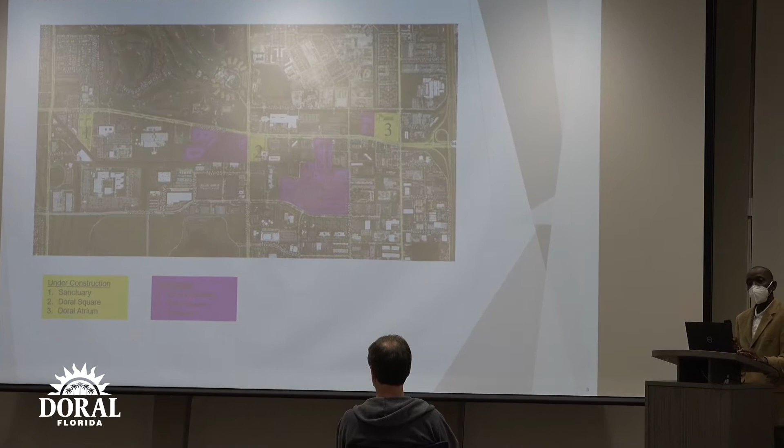These two here are under construction. Actually, these two here, the Doral Square and the atrium, which is at the far end of the corridor, are still under construction. And the sanctuary, which is not too far from here, has already been completed, and people have already started moving in. And these ones in purple were completed a few years back.

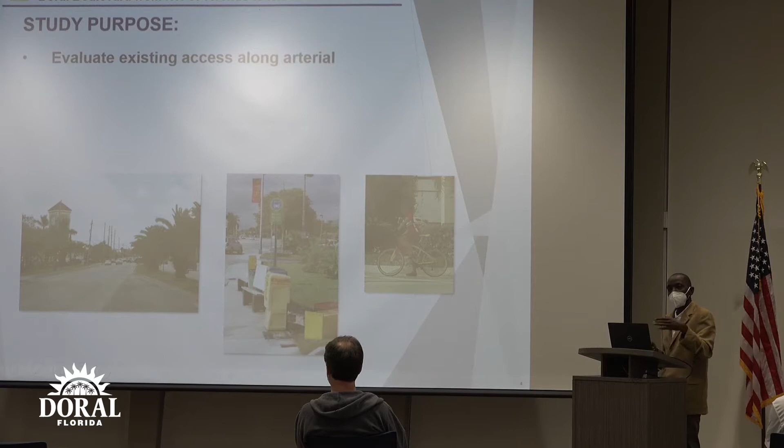So the first purpose is basically to evaluate the existing access condition along the corridor, identify potential improvements that we can recommend to enhance safety, improve mobility, and also enhance traffic flow for all modes. This includes vehicles, pedestrians, transit, and everybody else. And then the last purpose is to improve accessibility and connectivity to all the businesses along the corridor.

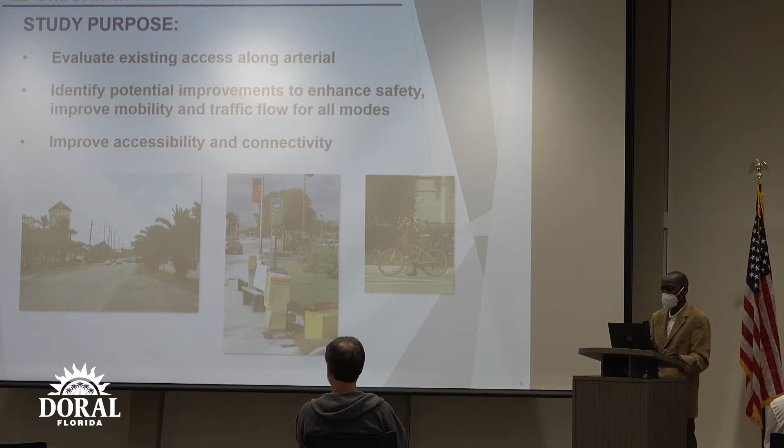The study has got a 9-month schedule. We started this back in November with data collection, which we have completed. And the final report is not expected until sometime in July, after the client has reviewed our recommendations and we have gotten input from other stakeholders.

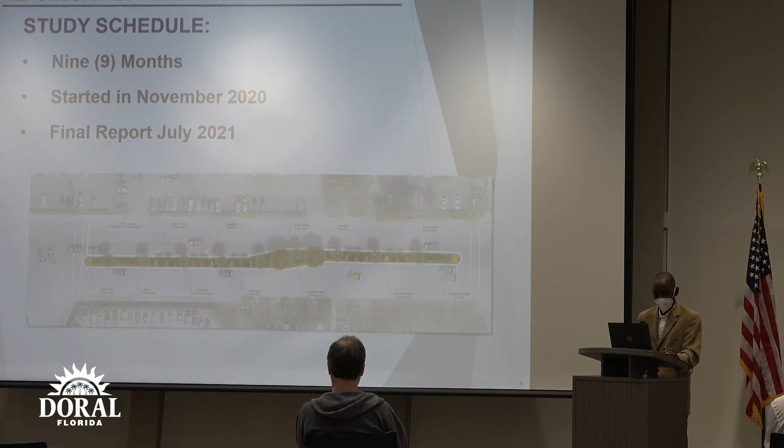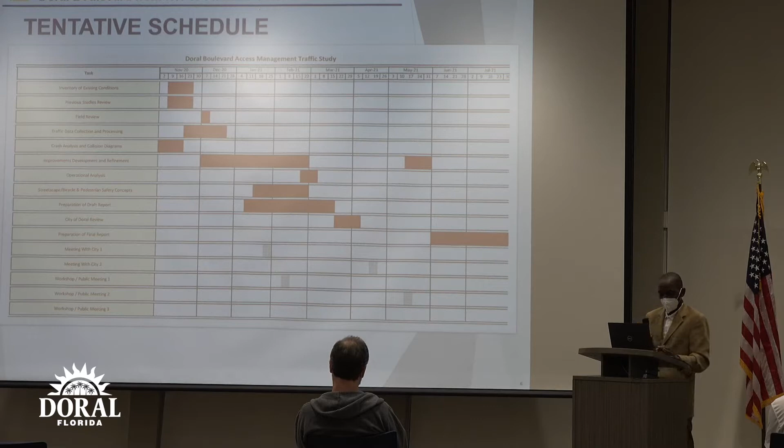This is a schedule of all the activities that we are going to be conducting. I don't know if you guys can see this, but this workshop that we have today is also in the schedule. So this is the first workshop that we are having, just to inform you about the study. And we are going to have another one sometime in April, where we'll have some concepts already developed so that you guys can see what we are proposing to change along the corridor.

These are the study limits, as we say. It starts at the western end, just to the west of the 97 Avenue signal. There's a median opening that services the Publix Plaza. So that's going to be the beginning of our western end, and then it goes all the way to the Palmetto here. This is the signal from the off-ramp. So this is the limit.

We have all the businesses listed. We have all the median openings shown, and we are showing also the same information on the board over there. So our study methodology basically includes the following activities.

We are going to be doing traffic data collection, which we have already completed. We started this exercise back in November. We are looking at traffic data, vehicular data, pedestrian data, bicycle data. So we have already completed that, and we are going to be making some adjustments to that data, given that right now with the pandemic and everything, traffic might not be the same. So we'll be doing some tweaks to the data that we have collected.

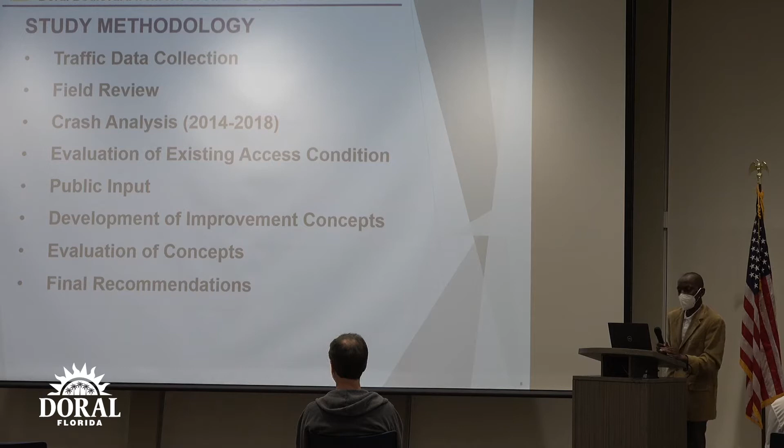So up to this point, like I said, we have already completed the traffic data collection. We have conducted the field review, completed that. We have done the crash analysis. We're going to be showing you some of our findings about the crashes along the corridor. And we have also completed the evaluation of existing conditions. So we know the median locations, how far apart they are from each other, and what we think needs to be done going forward in order to make the improvements.

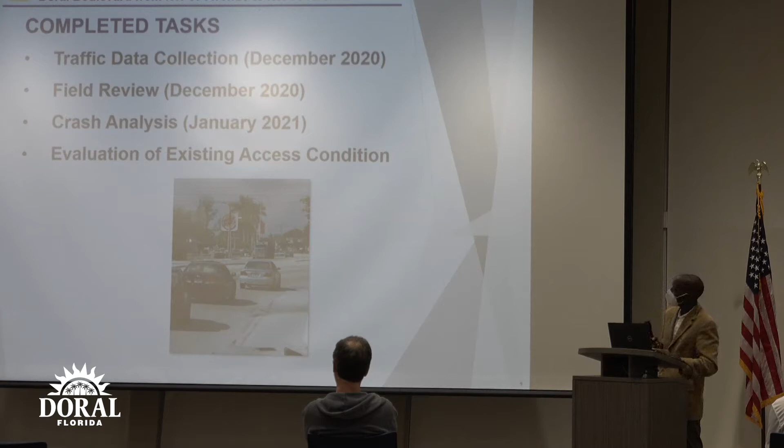So this is a summary of the findings from the existing condition. So the corridor itself, if you start from 97 Avenue all the way to the off-ramp of 826, we have 9 signalized locations, which probably you all know about. And then we have 20 median openings.

The 20 median openings consist of 17 full median openings, meaning that a full median opening allows all kinds of movement. You can come from a side street to make a left turn. If allowed, you can go across if there's a receiving lane on the other end, and you can make left turns from the arterial, from Doral Boulevard. So we have 17 such full median openings, and then we have 3 of them which are directional, meaning that they only allow left turns from Doral Boulevard, either in one direction or both directions.

So the median openings and the driveways that we have, given the existing spacing between them, most of them do not meet the FDOT criteria, which is what we are going to be using to do the evaluation to see if the access meets the criteria or not. The criteria is mostly based on the spacing.

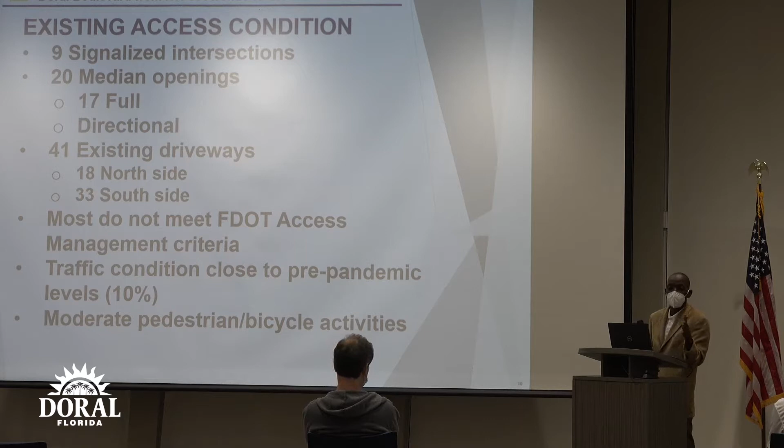We looked at the traffic condition. Like I said, we have completed this exercise of traffic data collection. And from our initial findings, we see that the traffic is within 90% of the pre-pandemic levels. But we will be doing some tweaks to the data just to make sure that we don't leave anything out. So if we say we close a median opening, we don't want to close it based on wrong data. So we are going to be making sure that the data that we're using for this exercise is absolutely close to what the reality is.

And then we found out that the level of pedestrian and bicycle use at the time when we did the data collection was a little low, was moderate, I would say. There were some activities, but it was moderate. Yes, sir?

Yeah, so the traffic data from all those developments, we'll take those into consideration when we are evaluating the future conditions. So once we have developed our improvements, we're going to see what it is that we're looking to be having along this corridor, say, in 5-10 years when all these developments are in place. So yes, we'll take all that into consideration.

Hi. So right now we're just doing the existing evaluation, and we're collecting all the traffic studies to develop the volumes and then do the projections based on the alternatives. So we'll study all the alternatives, and then we do the projections, the diverted traffic, once we build out the future volumes. But we're collecting that data now to develop the future volumes to then start testing the alternatives. But we're not there yet. Thanks, Rita.

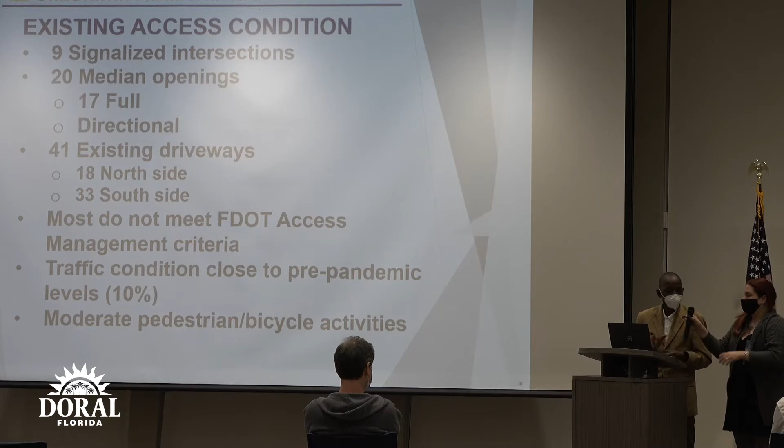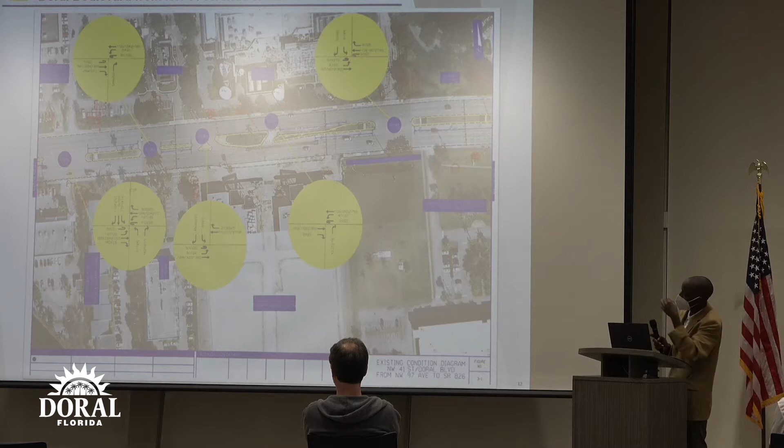And the things you see in yellow here are the peak hour traffic data that we have collected at these locations. So we have three numbers there. We have the number during the AM, the morning peak hour, and then the number during the midday when people are going out for lunch, and then the number during the afternoon peak when people are coming from work and going back to their residences. So if you go along the corridor, you'll see all this information at each location where we have collected the data. So I'm just going to skip through this.

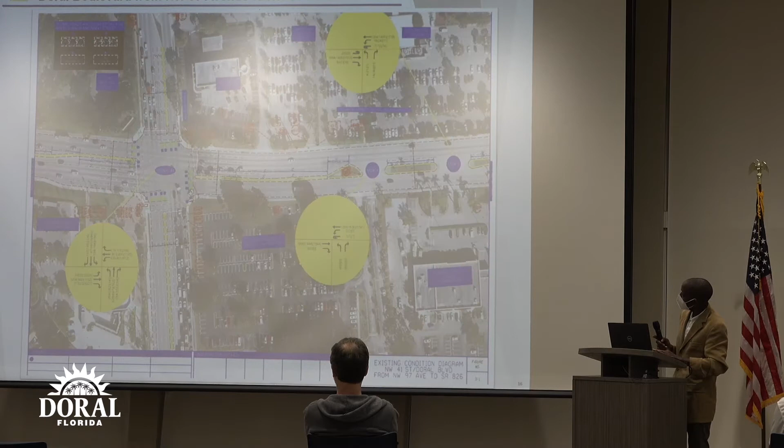So when it comes to crashes, in the 5 years of data that we looked at, we found out that there were a total of 992 crashes, almost 1,000 crashes. And the split of these crashes involved 107,

Oh, did I skip one? How do I go back here? Sorry, just a minute.

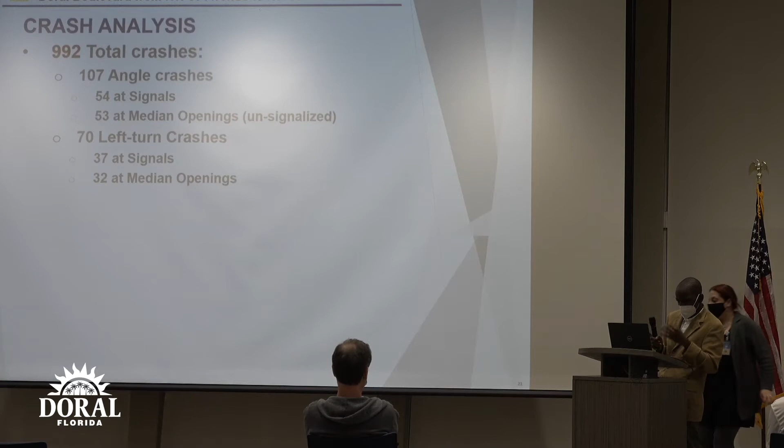Now I want to go back to the last slide. Yeah. Oh, okay, that one is here. There? Yeah. Okay.

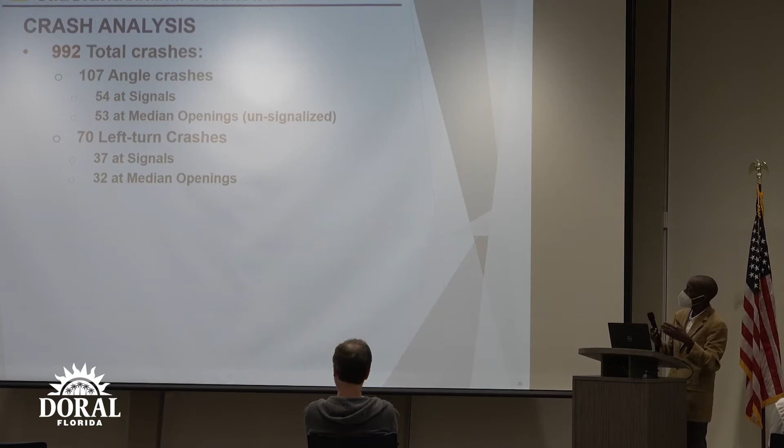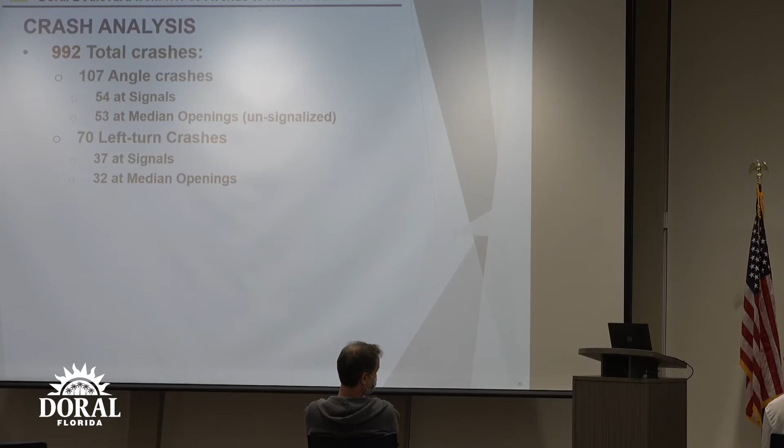There's one slide I'm missing here, but anyway, we had a total of 992 crashes. 107 of them were angle crashes. Now, why is this important? Angle crashes mostly involve, let's say for instance, a situation where, if I can move here, someone is coming out of their Publix plaza and they want to go east. And then you have someone driving along the corridor in either direction and they T-bone each other. We call that an angle crash. Okay? We also have 70 left-turn crashes.

That involves a movement like you want to enter into the Publix plaza, so you're going east, you want to turn left, but then there's this guy here coming from the signal going west. And then for some reason, because you misjudged the gap or whatever, you run into each other. We consider that a left-turn crash. These are important, especially when we are dealing with the median openings which are not signalized, like at a signal. So we had 70 left-turn crashes and 107 angle crashes.

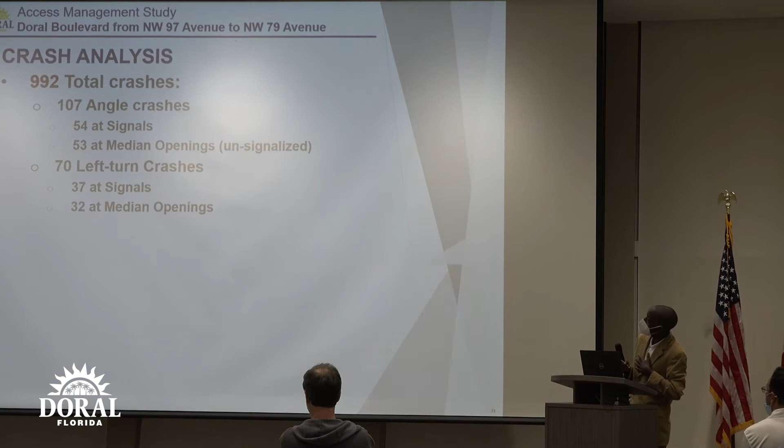Now, of the 107 angle crashes, 54 of them happened at signalized locations, at the 9 signals. They are spread throughout the 9 signals, and I'll be showing you where most of them happened. And then we had 53 at these unsignalized locations, at the median openings where we allow all these movements from their businesses to the north or south. And then of the 70 left-turn crashes, 37 of them happened at the signals, and 32 of them happened at the median openings.

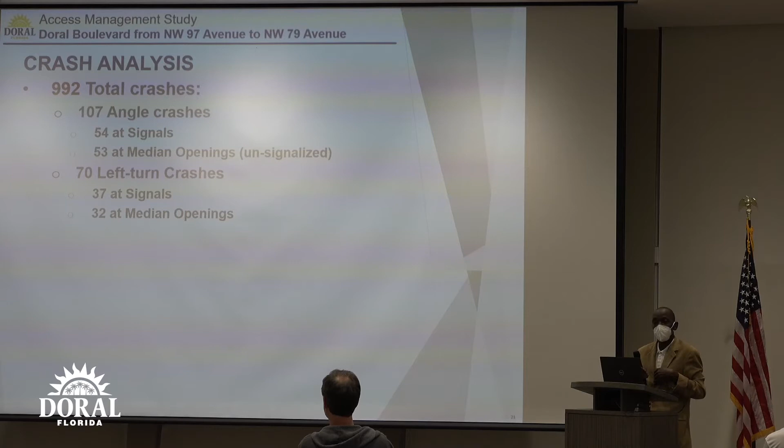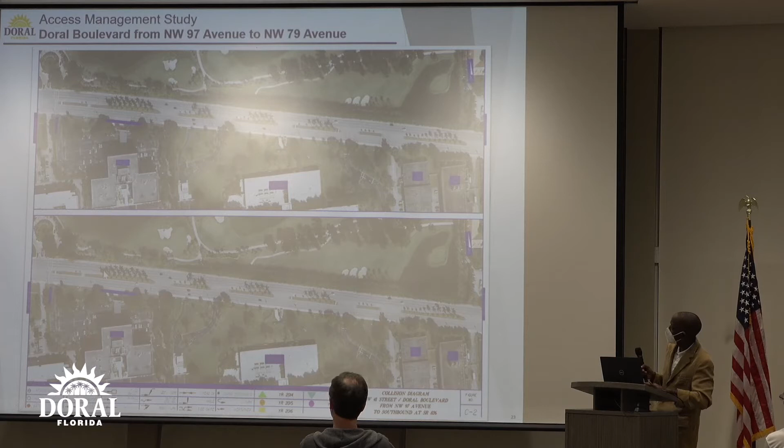So this gives you an idea of the crash pattern, and this crash pattern will continue as we add more traffic with all these developments. So we are not expecting these numbers to go down. Most likely they're going to go up. So this is, there's nothing on this corridor here. This is where the Federal Reserve is, I think. No, this is the AT&T. This is where the Federal Reserve is. Nothing happened in this corridor. At least in this part from 93rd all the way to this signal here, we didn't have much happening.

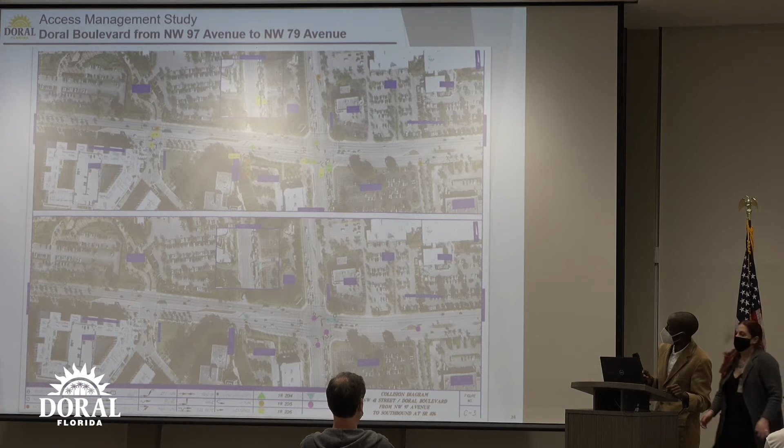Now this is 87th Avenue, as you can see. At 87, we had a few crashes, but not as bad as what we would have expected given the amount of traffic. We had a few angle crashes, but for angle and left-hand crashes, the numbers were not as bad. But when you combine all the crashes, like rear end and sideswipes, rear end is when you're following each other, and the person in front of you stops and you run into them. Sideswipe is when you're trying to change lanes and you misjudge how far the other vehicle is. So when you combine all the crashes, the number is high, but when you just look at angle and left-hand, the problem is not as bad.

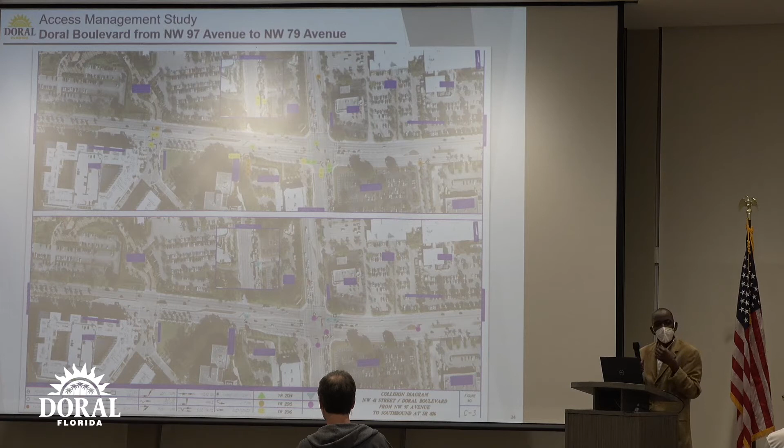We had a few crashes here at this opening, which accesses the Trump property. But all these crashes happened before that signal just to the west of it, at the Gateway. Is that the name of the property? Those apartments, the Gateway, right? So this happened before that development was completed, before the signal went into place, and before they modified this median opening here. So in other words, we do not expect to see that problem going forward.

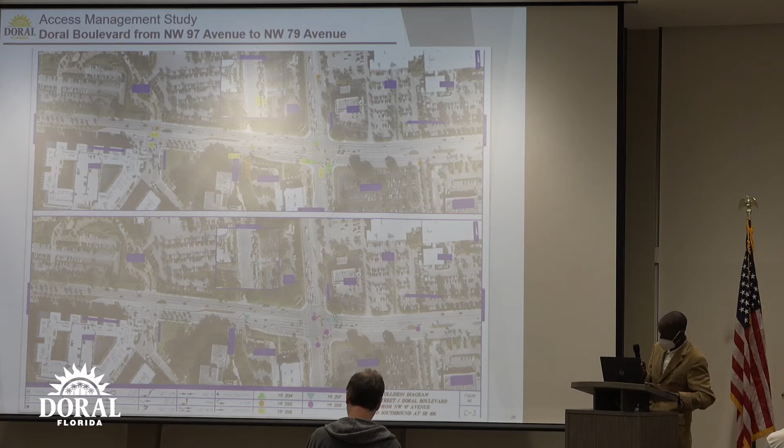Okay. And then, as you can see, we have a few more crashes scattered along the corridor. So this information is one of the things that we'll be using when we are contemplating what kind of improvements we are going to propose for the corridor. All this information that I'm sharing with you, we are going to take into consideration to see what is feasible and why. Why should we do this here? Why should we close this median opening here, or leave it open?

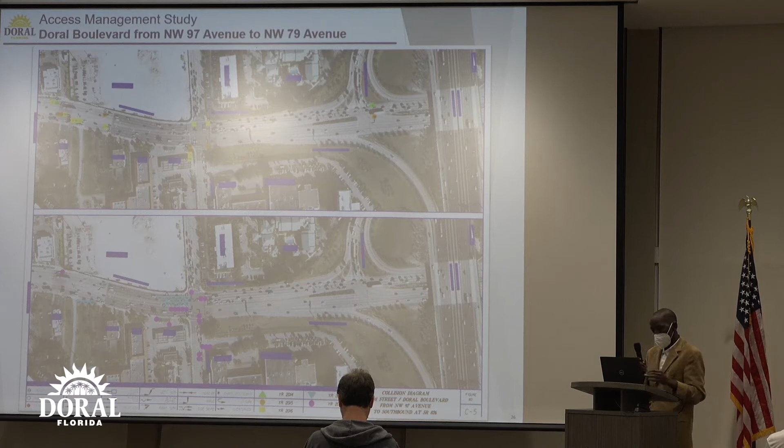And those are the steps that we have. Those are the things that we have completed so far. So the next step from now going forward is for us to look at all this information that we have collected, and then start developing our improvements, and then evaluate those concepts from an operational standpoint of view, and also from the economics of it, and then provide them to the client.

So sometime in April, we are going to be having another workshop where we can share with you guys what sort of improvements we have so far developed. So with that, at this point maybe you might not have any questions, but if you have any question, we would be more than happy to try to answer them. But this is still work in progress. We're just at the beginning of the exercise. We're still looking at all these concepts, so if you have any question, please feel free to ask.

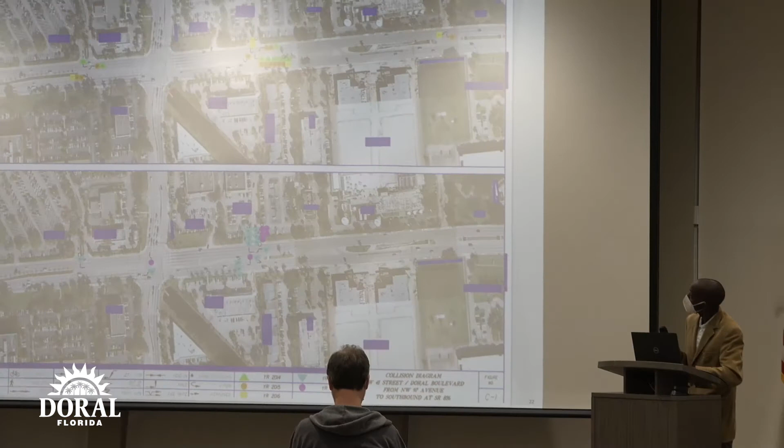Some of them might be like the one I showed you. Yeah, like this one here. Like this one. See all this data, all those crashes? This is at the same location. So this plus what you see above, this is just a two-layered view of the same crash. We had 29 angle crashes in 5 years. That obviously is a very tough spot, and if anything has to be closed, that will be among the ones that we're going to be looking at.

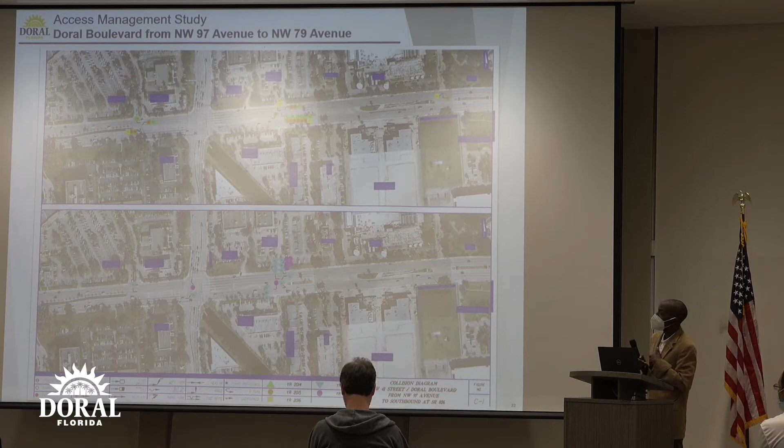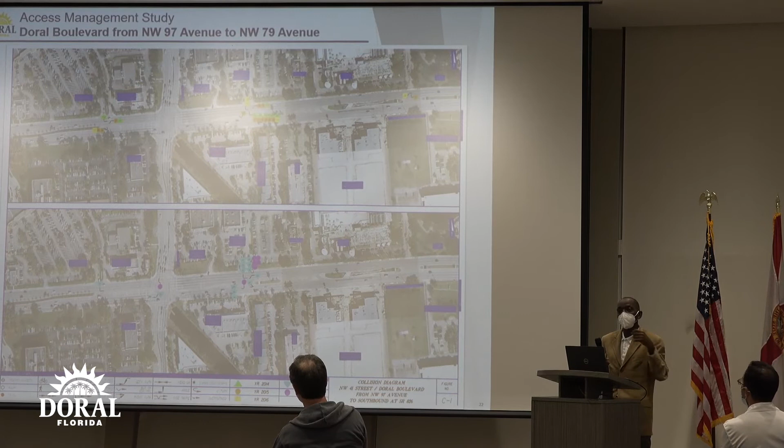Yeah. This is the one. Yeah, so you got it? Yeah. Mm-hmm. Yeah.

If I may elaborate, we're going to be coming up with different alternatives based on different criteria to come up with improvements from a holistic perspective throughout the corridor. And then we're going to be testing to see what makes more sense from a traffic perspective, because sometimes if we close something, we may impact another intersection upstream or downstream, and it may not be feasible. So we have to take a look at it from that perspective to see how we impact the area while mitigating traffic and the crashes the best we can.

Yeah. So thank God, like I said, we have some developments that collected data for those studies. So what we're going to do is try to compare the data that we collected against the data that they collected back then and see what the difference is like. And not only that, at one of the locations along the corridor, I think it's 87th Avenue, there's a permanent count station by the DOT. What that does is it collects data throughout the year.

So the data that we collected in December, we are going to compare that with that count station data. And if the difference is not significant, then we can rest assured that, yeah, it might not be the same as pre-pandemic, but the difference is not more than this number. It might be 10%, 3%. So those are the things that we're going to be looking at. Yeah.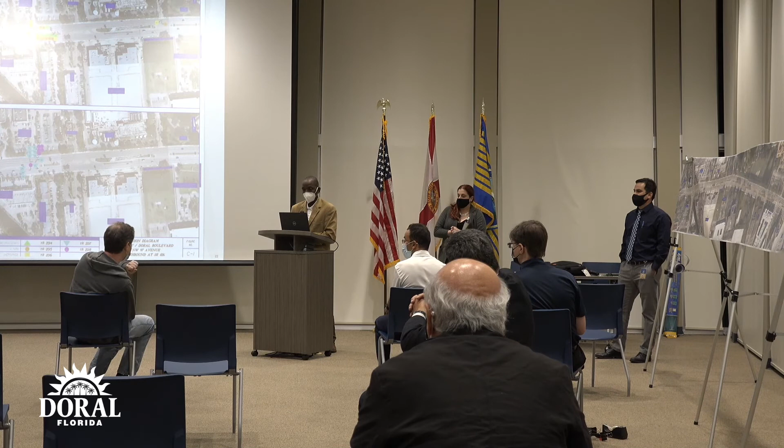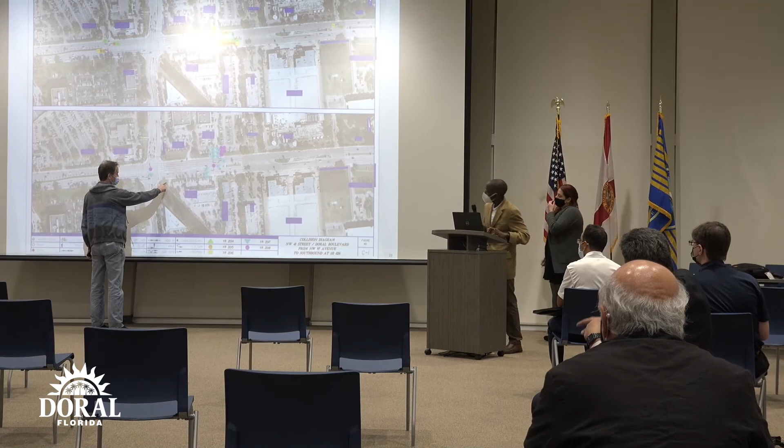Let me go to the Burger King location.

And you hit the red. Yeah, yeah. Trucks. No problem, they don't hear me. Someone wants to hear me. That's nice, I'm becoming popular for the good or the bad.

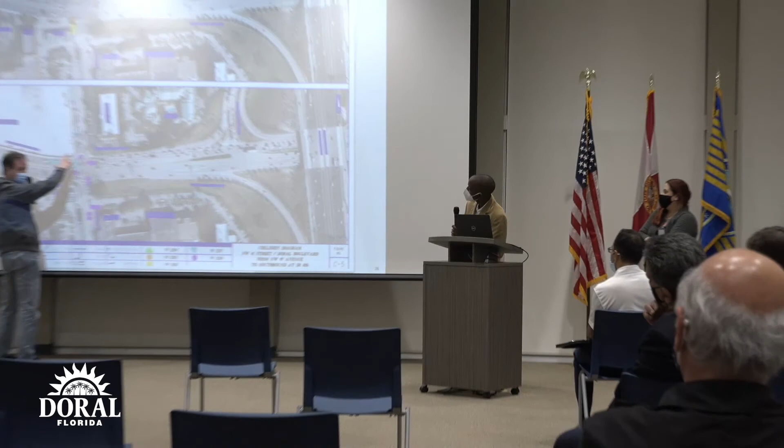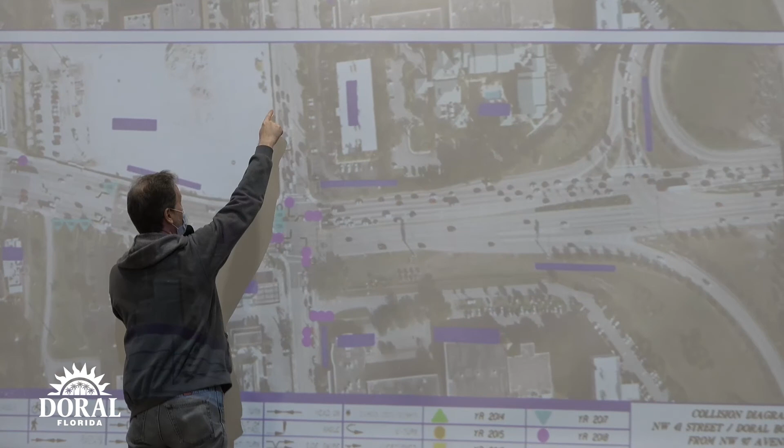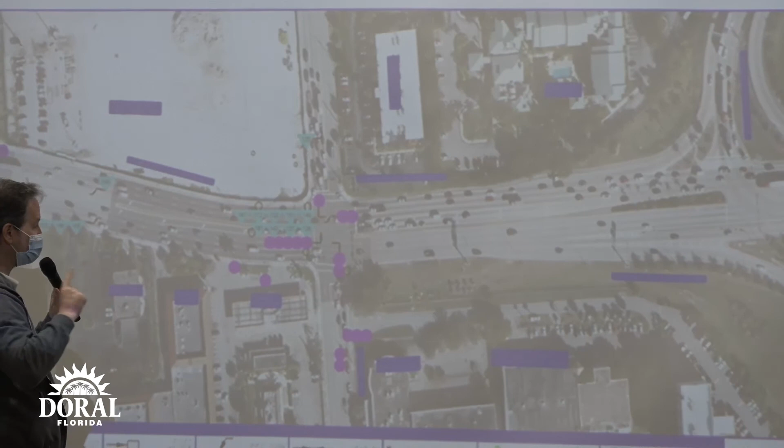Is there an option for consideration? Excuse me, this is 79, right? So taking the opportunity—I know this is private land and there are big plans for that—but on the rendering, this corner was kind of set aside for a monumental sign and parking. But you can see even in the picture the backlog of vehicles wanting to turn west is very big. Can we try to negotiate an extra turn-only right lane? And the same on 79 coming north, at this intersection by the canal—can we request an extra lane to turn right eastbound when going north on 79?

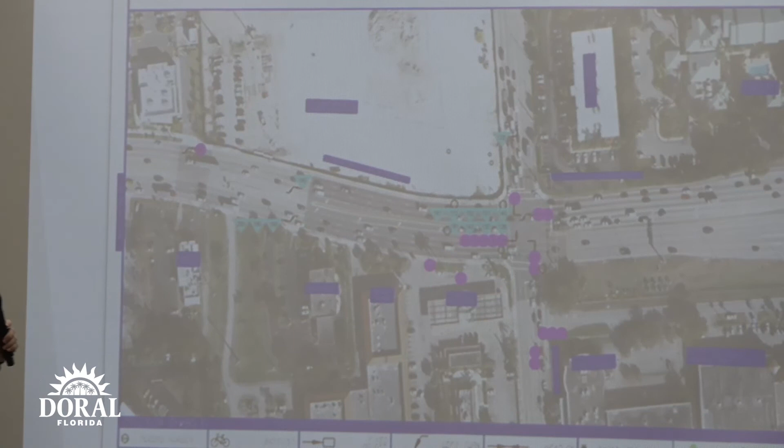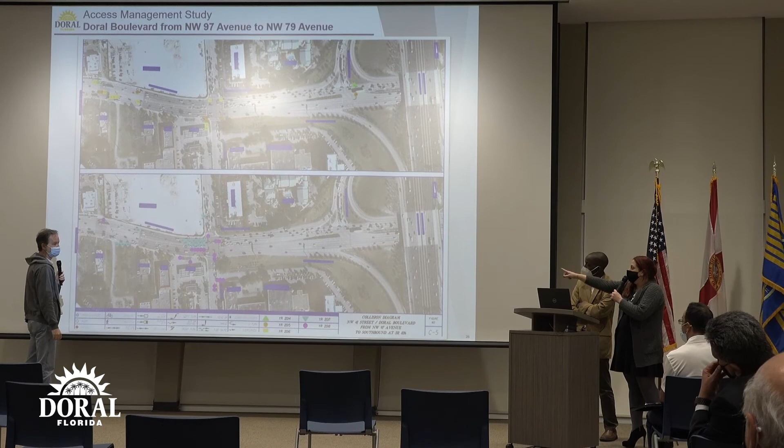For that southbound right turn on 79th Avenue, they're building it right now—that development is building the dedicated right turn lane as part of their improvements, and they gave that dedication to the city. The same here? Not there, because that's southbound. Northbound, I think that's FDOT, right? Exactly. So can we ask the same thing to be done southbound?

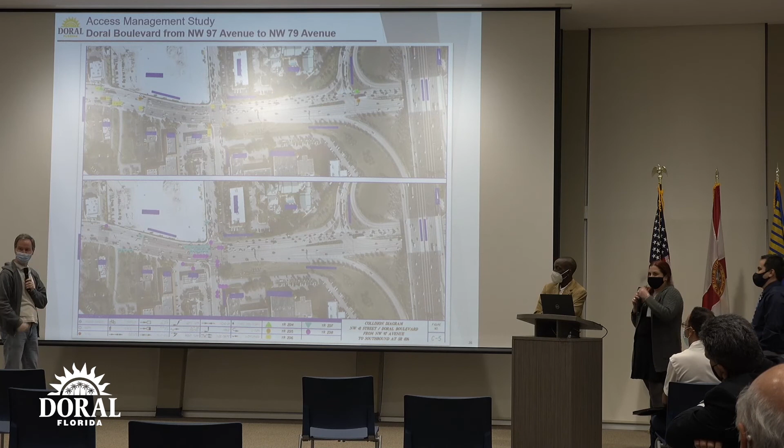Good, we have you here, right? Let's put our tax dollars to work for the benefit of the city. And northbound on 97 is the canal, so I don't know who's responsible for that.

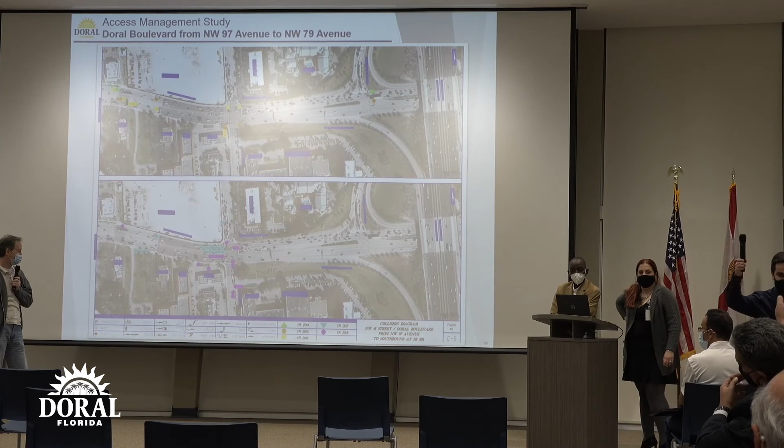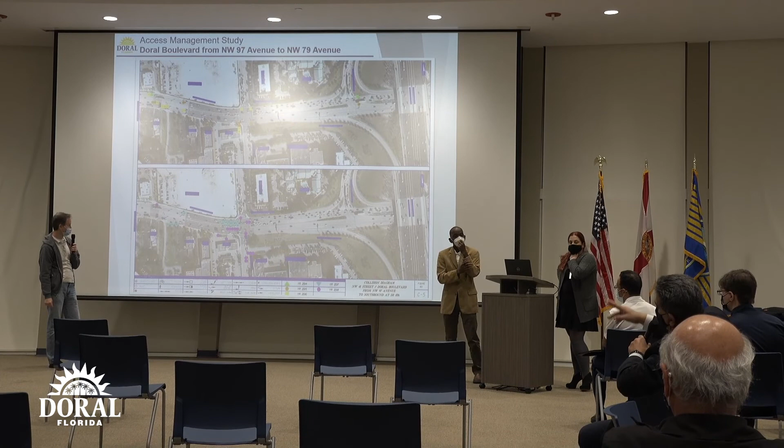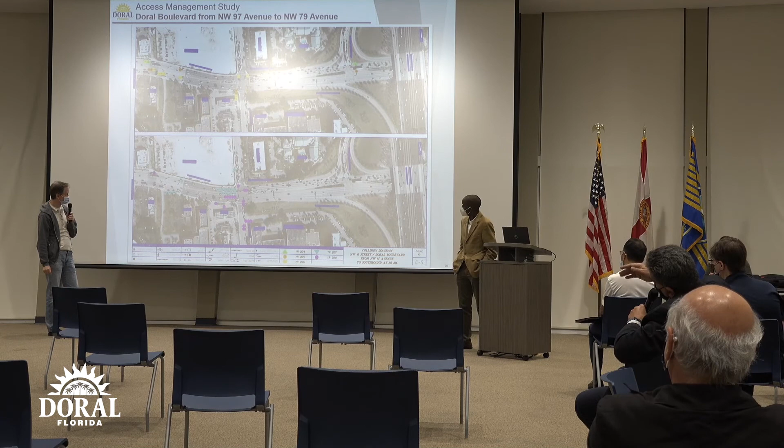Providing that right turn lane going north on 36 would create a weaving problem for people turning right who want to continue east into 36, because they'd have to cross two lanes. The extra lane you're providing doesn't go straight, it goes directly to the ramp. So you'd create a weaving problem that may cause additional crashes. Everything has to be evaluated. I'm not saying no, but there are situations where you solve one problem but add another.

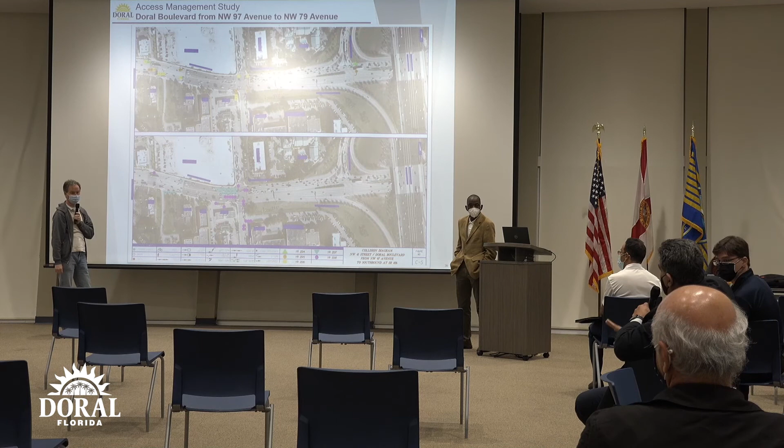At this intersection, when vehicles have the green light to go up, you don't have traffic going east. You have right turn lanes unless you change the signal phasing to make it a split signal phase. If you allow right turns without restriction, unless you post no right turn on red, right turns are allowed. With dual right turn lanes, people in the inside lane who try to weave into the center lane to go straight east will find the people coming west from the main line, and that can cause an issue.

Yes, I have seen some intersections in Miami for the first time that say no right turn on red. They put that when they did the cross weave on 17th Avenue and 27th Avenue.

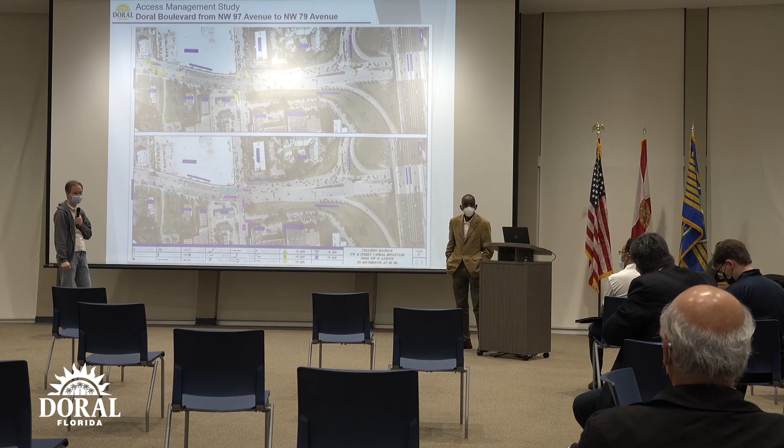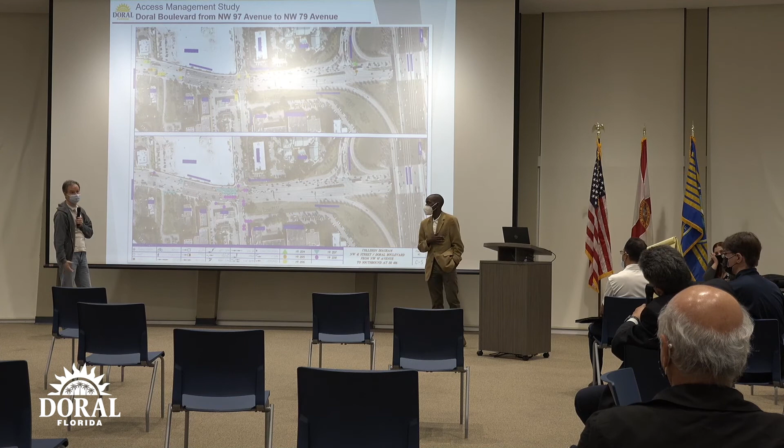Jeff tells me the existing condition has a right turn lane, and then the middle lane is a right-through, so at this point you're allowing two right turns. Maybe it's the buffer that's not big enough, but I see the stacking there.

What about the one on 97 going north to east over the canal? Oh okay, no problem. My time is over. No problem, thank you.

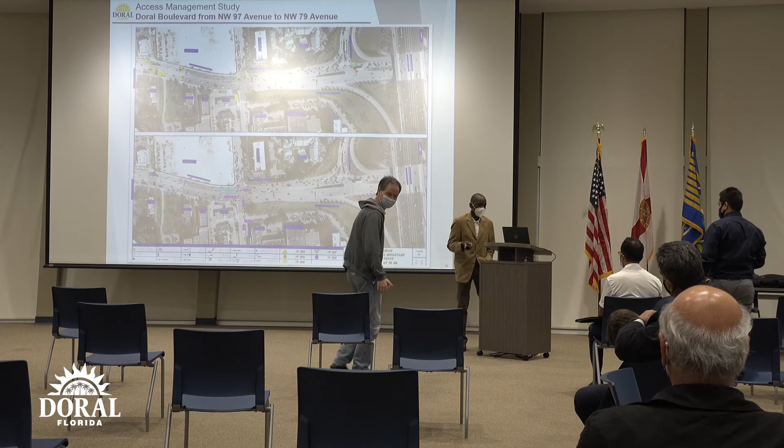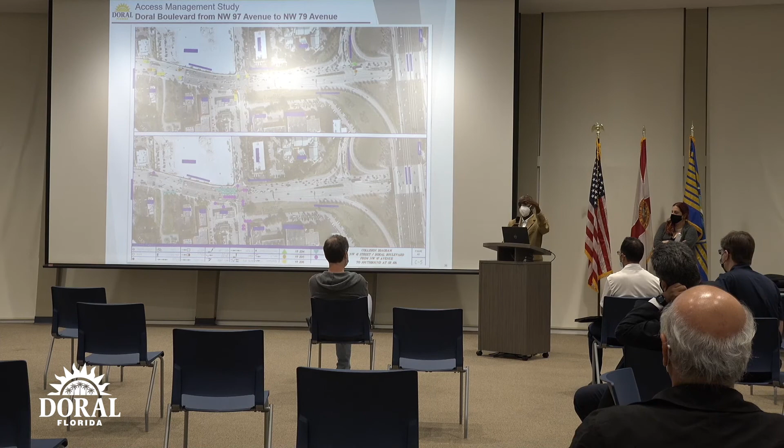Actually that's 87th Avenue going north. If we showed you all the crashes, remember this one is just showing the angle and left turn crashes. But if I showed you a diagram with all the crashes at that intersection, you'd see an amazing number of side swipe crashes on the northbound approach. I can't remember the exact number off the top of my head.

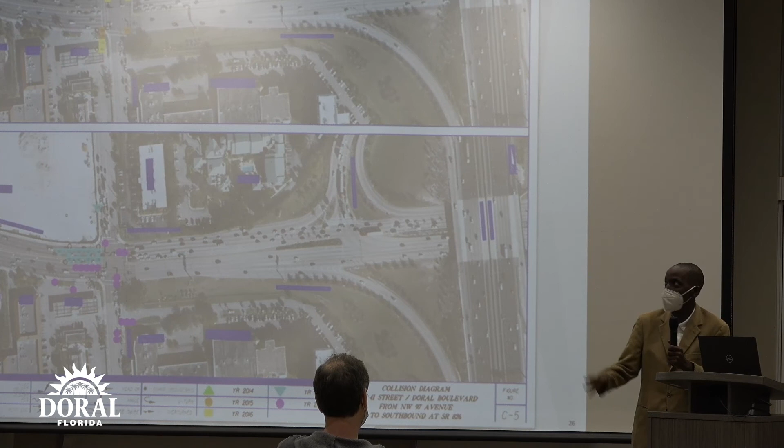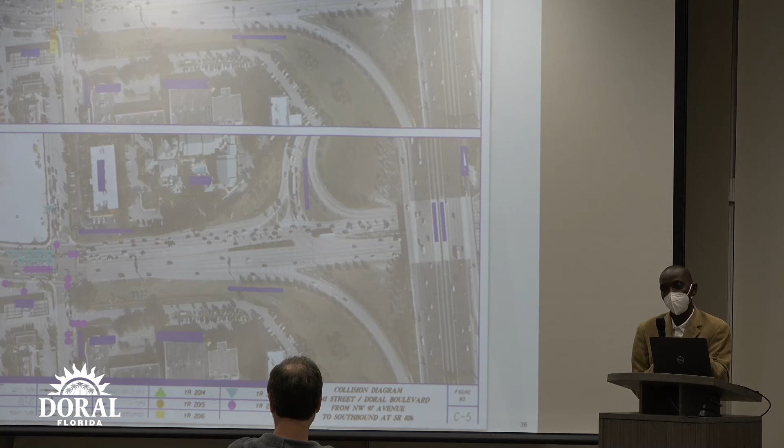Do you remember how many side swipes we had on this approach? It's a lot. You have a right turn lane, and the next lane over is a through-and-right lane, so a lot of people in the right turn lane, for some reason, want to continue north once they get there. They can legally make the right turn from the through-right lane, but it's mostly the guys in the dedicated right turn lane who violate the marking or signage and just want to continue straight. The number of side swipe crashes there is amazing. That could be one of our recommendations to the department or city, to see if those lanes can be reconfigured, once we look at the numbers to see what would happen to the operation of that intersection, because from a safety perspective it's really not conducive.

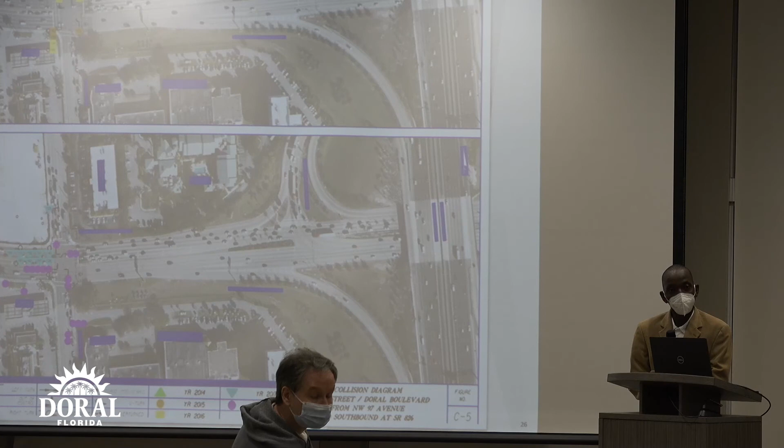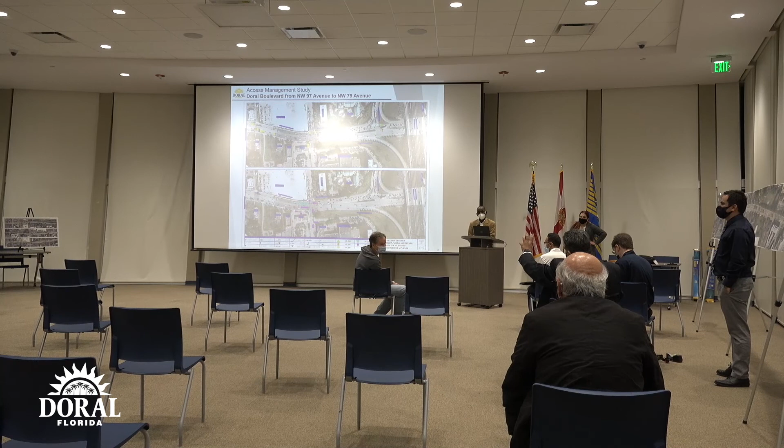One other thing, Pierre, is that the intent of this study is to evaluate access management, meaning evaluating driveways, median openings, and signals to control crashes caused by poor access management. That's an operational issue. What you're asking is doable, but it's not part of access management, it's part of operations. That's controlled by Miami-Dade Signals and Signs, a different entity, and they will have to coordinate.